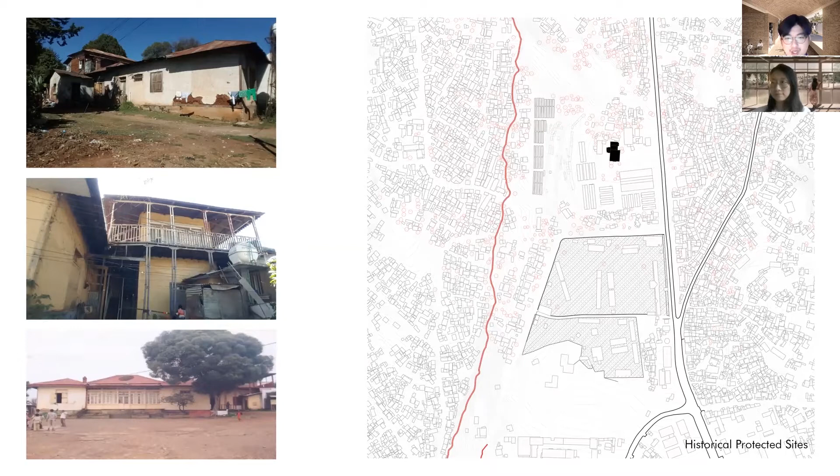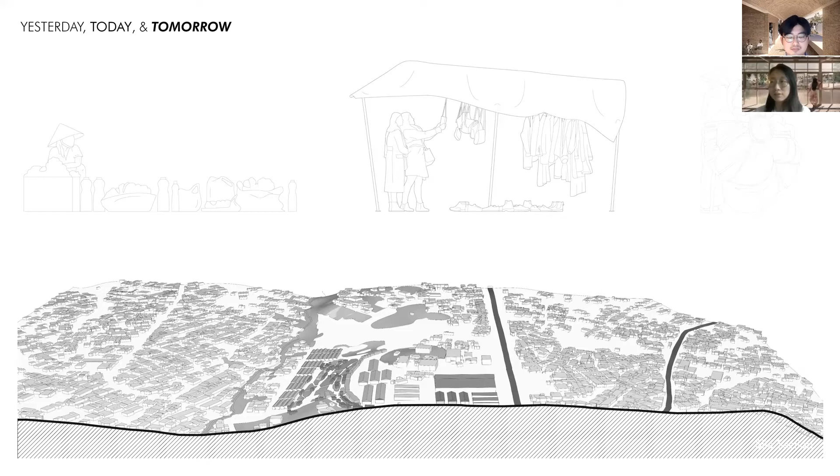So you just mentioned the main function of our site is the garment market. I'm curious, where are those clothes made and where do the people who sell stuff live? Actually, they neither work here nor live here. They just come here during the day for a short stay and go. So here we find the problem. There's a lack of long-term stay on our site, and the residential neighborhoods around our site are already overpopulated. We want to create a new neighborhood where people live and work.

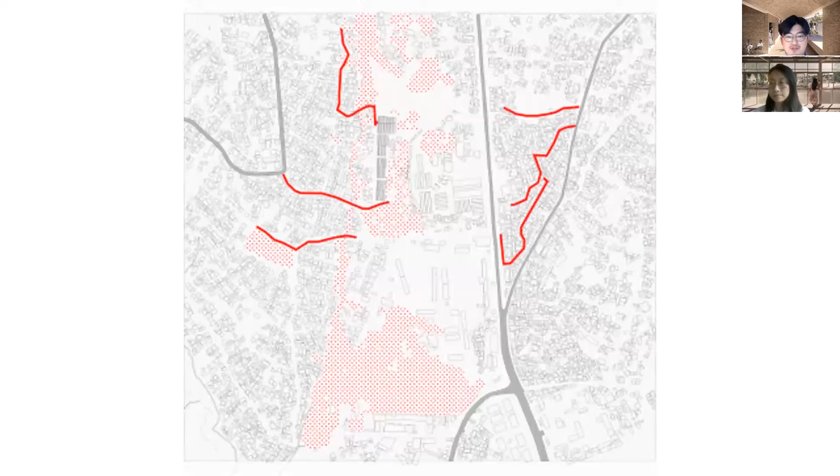In order to create a neighborhood, we propose three lines as a framework, and then propose a bottom-up growth strategy on these lines. Given the main function of our site as a market, it reminds me of another famous market in Iran, which features linear growth and courtyards for public space. Yeah, this collage was actually inspired by that market. There we can see a linear and bottom-up urban fabric, which features courtyards of many sizes to shape the market space. We refer to this concept and use courtyards to strengthen our proposal lines and make them incrementally grow in the city.

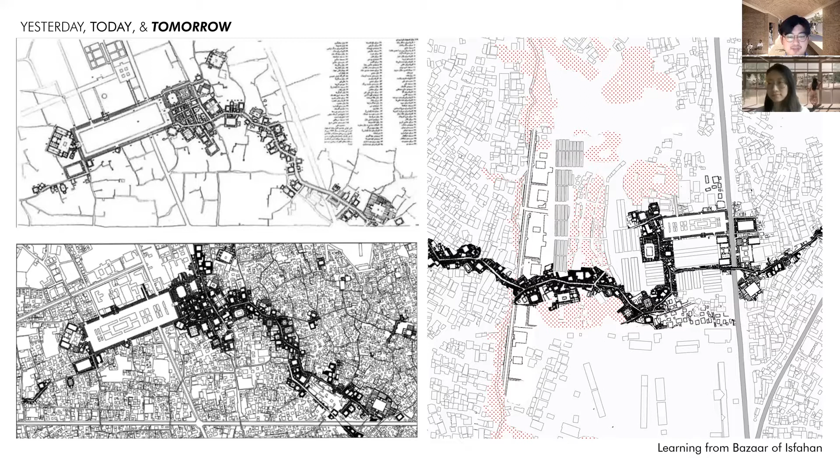In order to let the building grow in time, we invented a modular system with single or double-story units. Could you introduce more of the construction detail? Yes, of course. First of all, in terms of the material, we made a vault for the market according to the structure designed by the Philippe Block. The materials used in the arch below are bricks made of local soil and rock. There are diaphragms above the vault to support the second floor. For the second floor, we use a wooden column and beam structure to make the floor plan more flexible, because the workshop requires a larger continuous space.

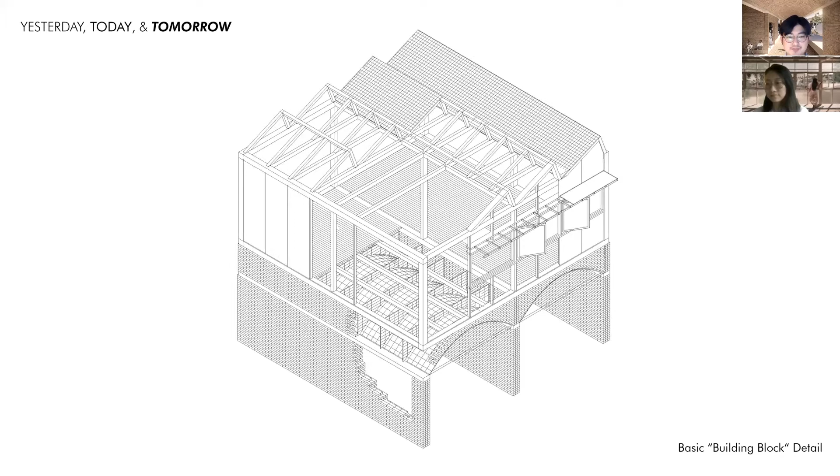So there are four types of units. They all include the market on the first floor and either housing or a workshop on the second floor. The units are easily attached to each other to form courtyards, and they are also flexible enough to deal with the steep slope on the site.

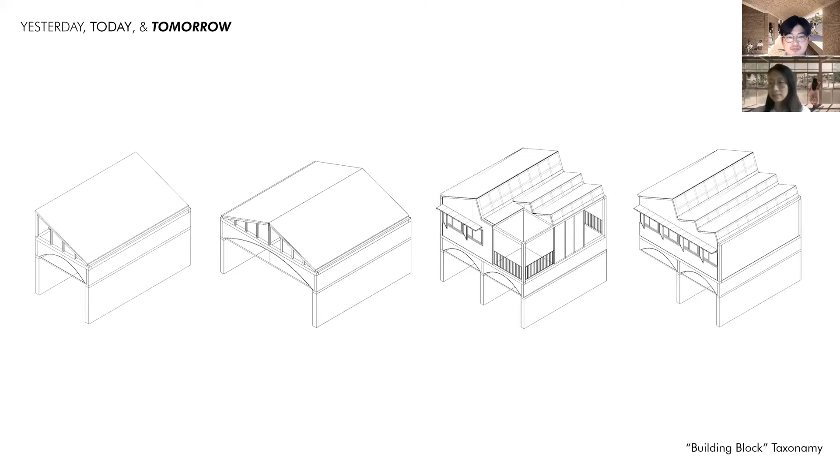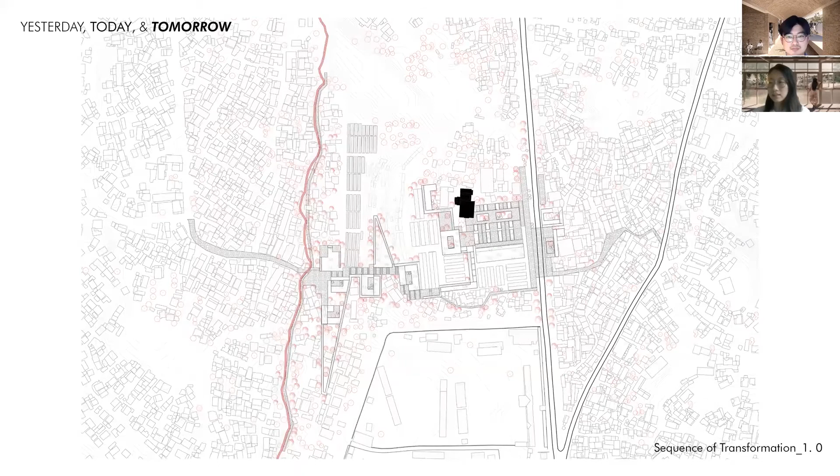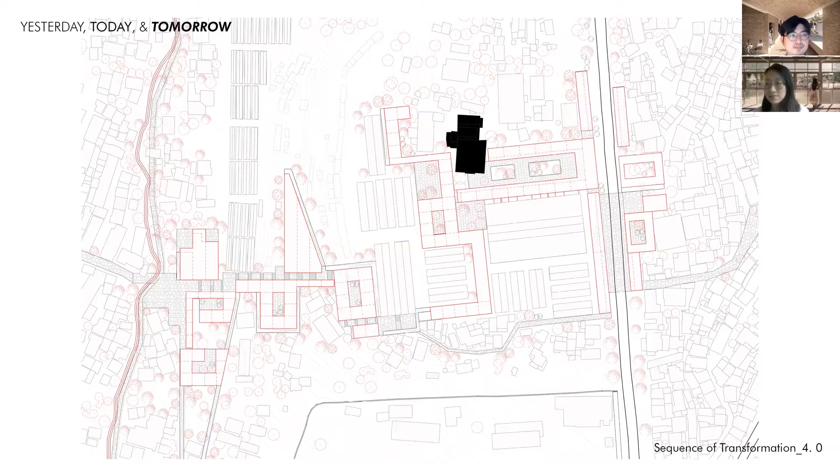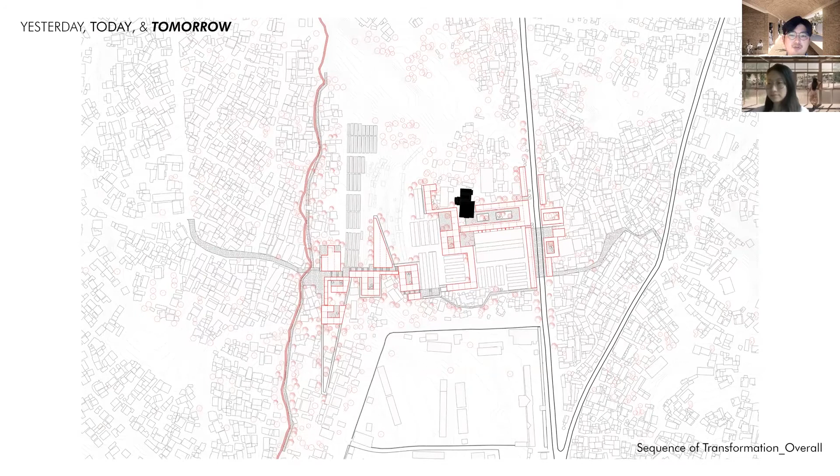And we imagine the process of development will be: first of all, the building materials are produced in some of the existing informal markets to build new homes on our site for the residents near the river. Then some of them will attend the vocational training program to get basic construction knowledge. In the end, these residents will participate in the construction process to build the entire area, helping Shiro Meda incrementally grow.

The other key point of our project: first of all, we hope that the building materials are all from the local area. For example, the raw materials of the bricks are taken from the local rivers and mountains and made by compressing and sun exposure. Moreover, the wooden structure of the building is taken from local trees that are cut down due to our project.

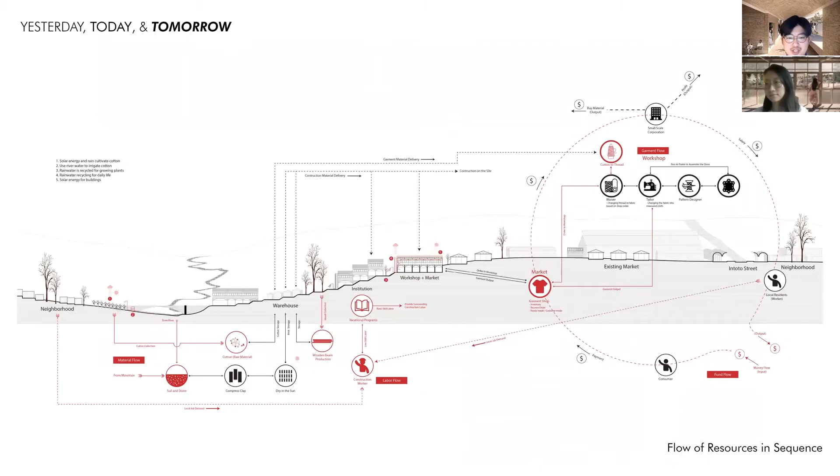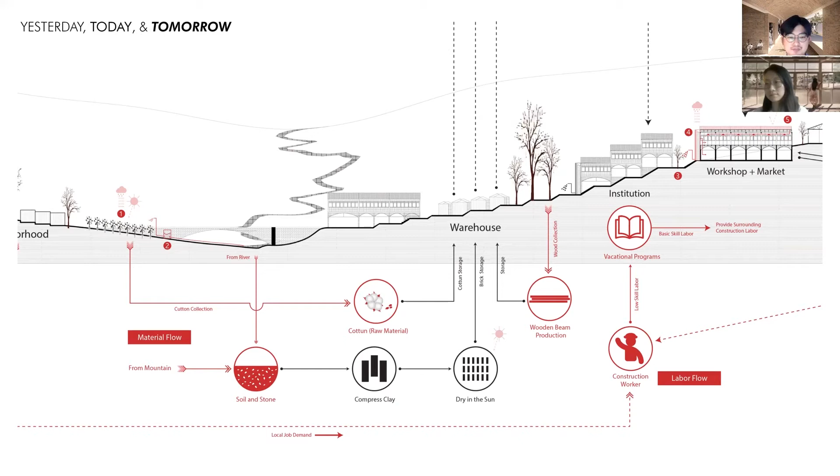In this way, the cost of material transportation can be reduced, and the dependence on imported construction materials can also be reduced. And the same strategy for the raw material for the garment industry. We also hope that it can be localized. In this way, cotton can be directly supplied to the workshop to be made into yarns and finally sold in our markets.

And in terms of the energy flow, all unit types are considered for rainwater recycling. The recycled water can be used as residential water and water for planting. Rainwater is collected and will go down and be stored in a water tank. Clean water will be on the upper level of the tank for residential water. The dirty water will precipitate and can be used for watering plants.

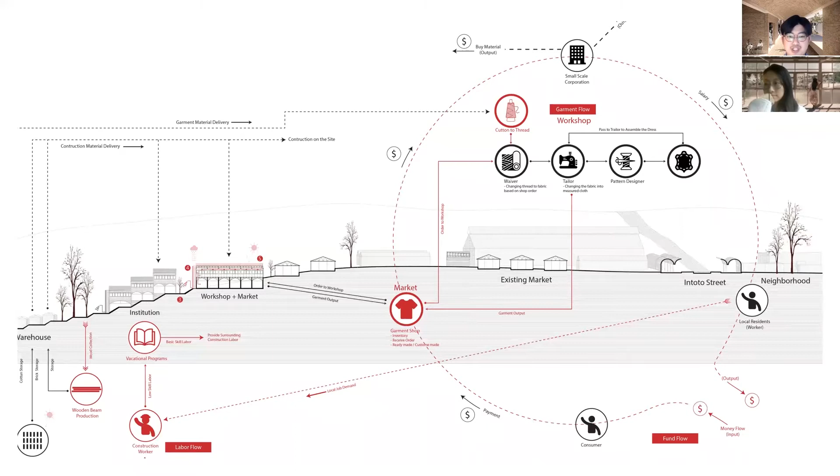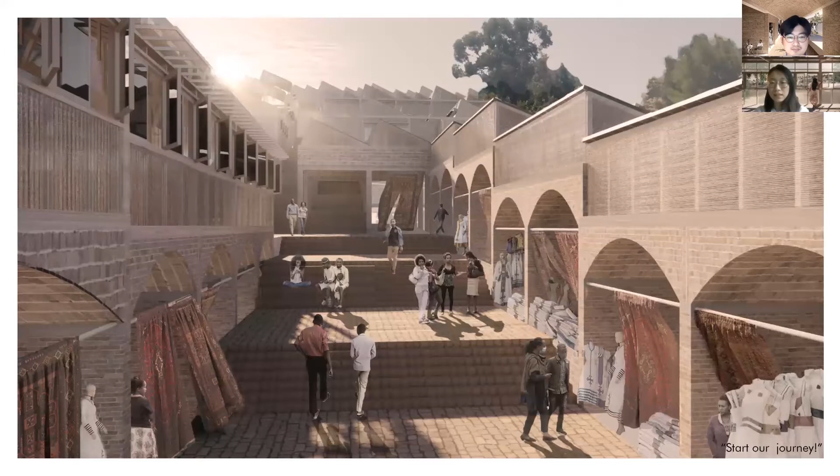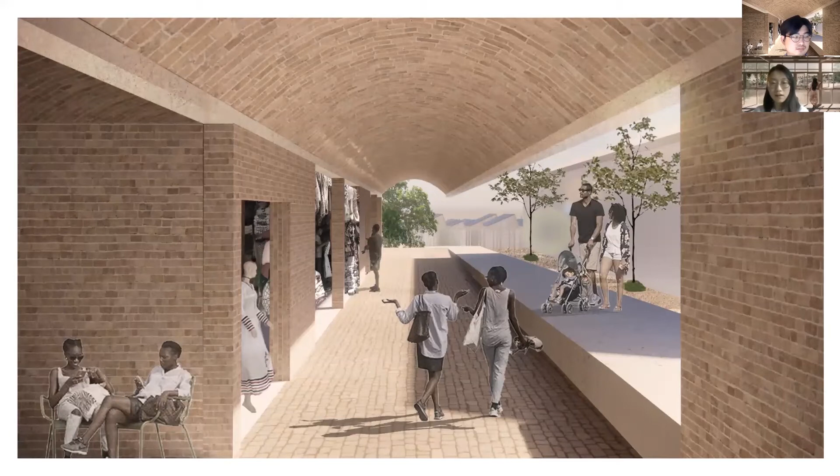Second chapter, a journey. So as we stated before, our main goal is to transform a place, which is the garment market of Shiro Meda, into a space where people can get a unique experience. So these are the renderings of the cobblestone-covered streets and the inner markets inside a vault, and also along Entoto Street, the vaults people enter to see the historical building on the other side.

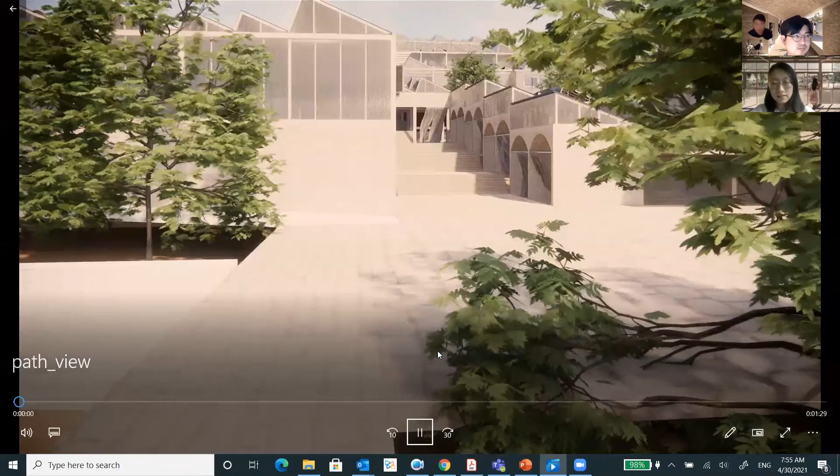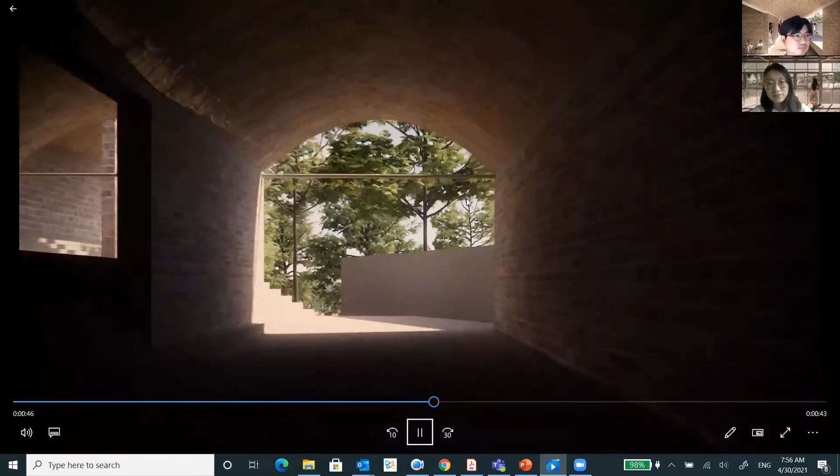Actually, we made a video so that you can more clearly experience the site. So this is coming from the river, people walking along the staircases and streets. This is one of the courtyards, and another courtyard, which is a residential courtyard, that are meant to deal with the topography on site. Entering into a vault, which is one of the markets, and then going all the way up.

So this is a workshop on the second floor, and this on the left side is our existing former market. So these are all the stalls that people can get in and sell clothes. Finally, to our bazaar, and then see the historical building, the courtyard.

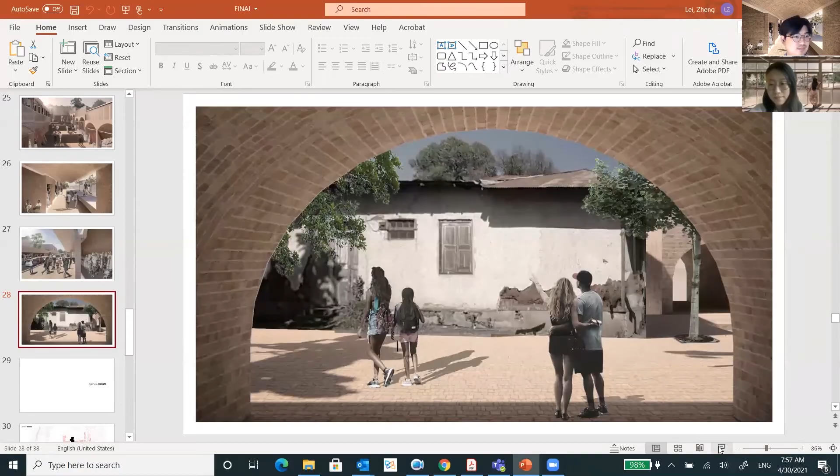Okay, back to our presentation. The last chapter, days and nights. As we stated before, our main goal is to create a 24-hour neighborhood where the residential, working, and market programs are mixed. So do the formal and informal systems of the market.

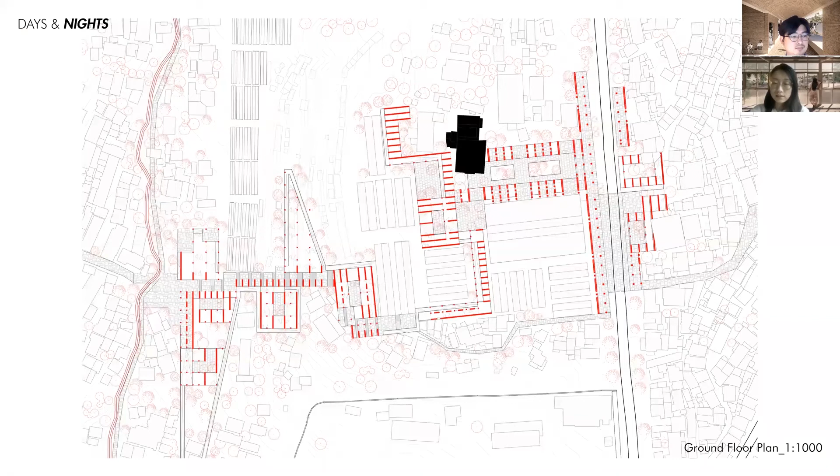As shown in this ground floor plan, you can see the structure. We actually regard this formal system as an infrastructure for all the market activities happening. And it also actively interacts with the second floor program, as you can see in this detailed plan, which shows the second floor residential units.

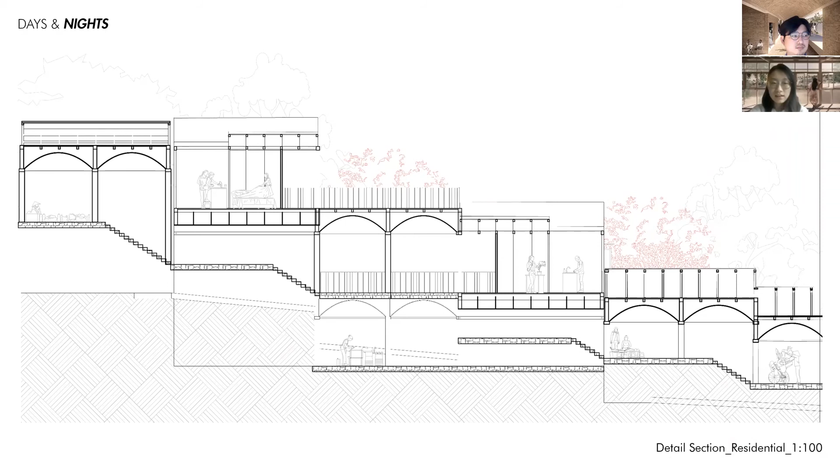And this section more clearly shows the relationship between the activities happening in the market and the activity happening in the apartments or the housing on the second floor and third floor, depending on the topography. So it shows that in the daytime, people work in the market and sell stuff, and at night they come to their home on the second floor.

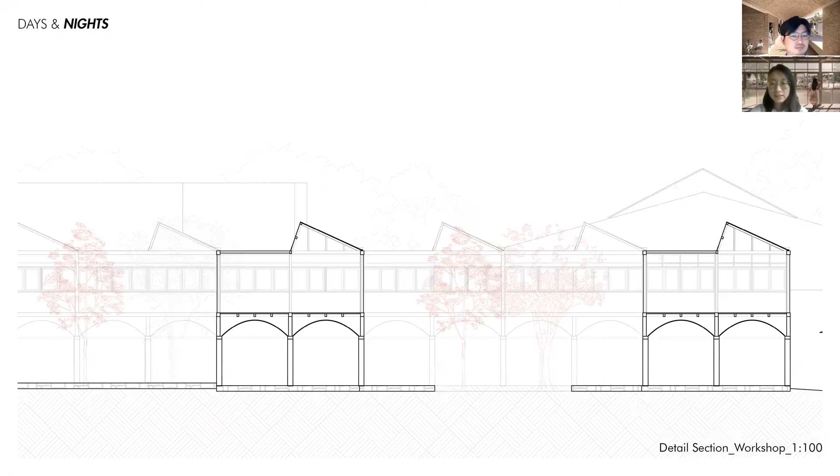Yeah, so given all those issues of the site we discussed earlier, the main goal of our project is, first of all, to relieve the housing pressure of the surrounding neighborhoods, especially the residents living close to the river, and then connecting the neighborhood and mixing the functions to make Shiro Meda not only a destination of garment shopping, but also a place where the locals live and work, where more public space is offered by creating courtyards in which a variety of activities will take place.